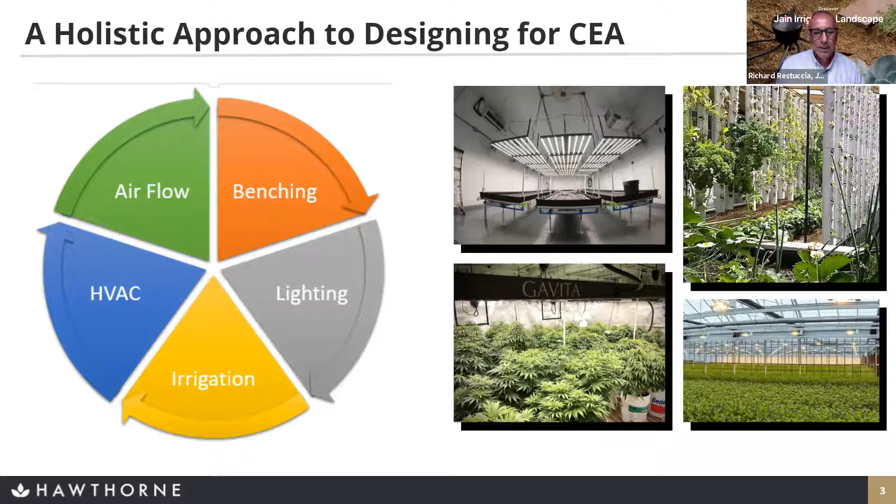And so in terms of design, that was a really great segue, because some of the design work, as you'll see on the left-hand side of the slide, is more about location, how things work geometrically inside the grow room. So we work with growers, depending on the types of crops and how people will flow and harvest throughout the room, on benching design, and we may help them with spacing and geometric needs. But we also do design work that has to do with irrigation, and in that case we have to do all of the specifications and sizing for pumps and all of the equipment that would be needed for an entire facility.

And by facility, I should mention that some of these commercial facilities are not just a few rooms or a few dozen rooms. They could be hundreds of rooms. So greenhouses are getting very, very large. And so this can be an extremely big operation to design the irrigation for these controlled environment agriculture cultivation systems. So on the right-hand side and in the top and the middle, I put in some images from our light design work.

Now, this doesn't just keep track of which products we're using, but it's using photometric software. So it's using mathematical software to actually assist in figuring out which light fixtures to use and where to place them. It also considers what the light levels are at different slices within the grow room environment. And so our design team uses this among other mathematical software to figure out how the design should be laid out, in order to provide the customers with a package for what they need to do to have the most optimal growth.

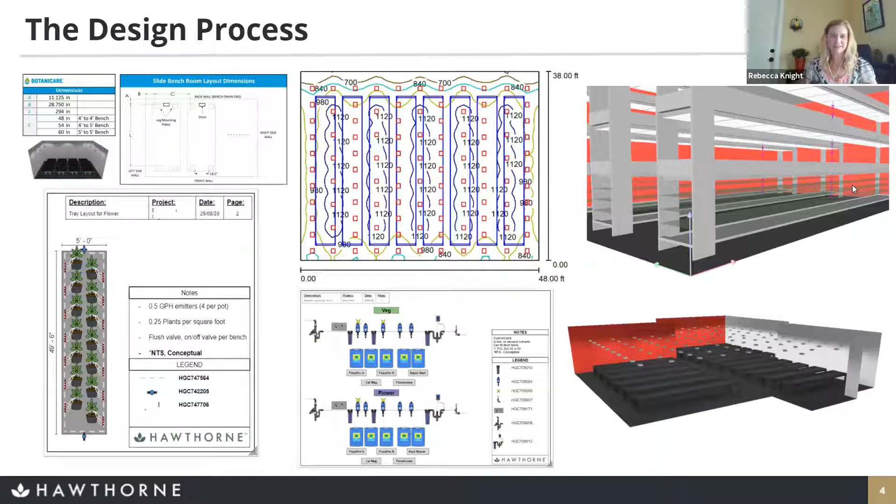So in the next slide, what I want to do now is shift into one of these areas. We're going to look at lighting. So we're going to talk about these interactions. The first one is going to be lighting and irrigation. So lighting is really, really important, as you can imagine. They're all important, but lighting is maybe one of the most expensive components of the operation. It also requires energy and cost to maintain, so to keep those lights going. So lighting is really important, and it has a very big influence on the grow room environment. It interacts with the environment, so with the other parameters.

So first, just want to point out that outdoors, we have the full spectrum of the sun. Granted, on a cloudy day, there'll be less intensity, but you get the full spectrum. Well, one of the neat things about indoor farming is you can supply just what the plant needs. So you're not going to give it the full electromagnetic radiation spectrum. You're not going to give it everything from radio waves to UV rays. You're just going to focus in on the rays that are important to a plant.

So in this diagram, you can see I've indicated red photons and blue photons. And that chart at the bottom kind of gives you an idea of the range of different colors that a plant would use. This is just a very general kind of range. But in the next click, what you'll see is that indoor lighting can come in a variety of forms. So each of these forms will produce different spectrums, different wavelengths.

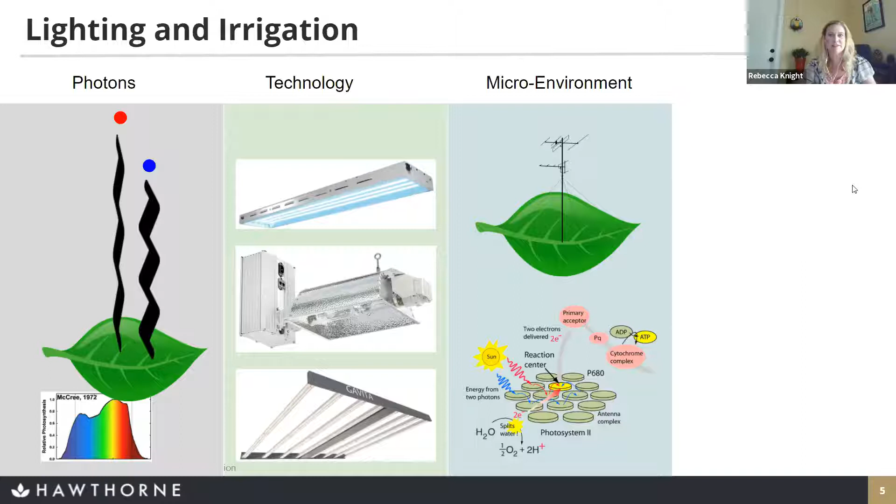All right, so one thing that I think about here is, we get about 12 hours of daylight right now, or sunlight, in Southern California. So in an indoor controlled environment, can I put the lights on for 24 hours and get 2 days of growth in one day? So that is a really great question for this last section of the slide. That's a perfect question, because it turns out that you cannot. And the reason is this. So I think if you click one more time, you'll see two terms that come up.

The first term is called the daily light integral. All plant species have what's known as a daily light integral. It's a value that indicates how much light it needs per day to thrive. Now, there are some plants and some microalgae that can develop their own circadian rhythm, but most plants need to have a dark cycle as part of their metabolic pathways and control. So plants have what's called a photoperiod. That's how long they're exposed to light. You can put a little bit of light on your plants and expose them longer with a longer photoperiod, or you can give them more light and a shorter photoperiod. Either way, you're giving them the same amount of light per day.

The caveat is, as I mentioned earlier, you can't give plants more light than they can handle. You'll have photodamage. That's too much energy. So there's always going to be constraints in terms of the maximum light levels you can give the plants. But the DLI is this indication that many things are interconnected. In this case, it's the particular crop and the developmental stage, the DLI, how much photoperiod you're giving it, and the intensity of light. So those are interchangeable.

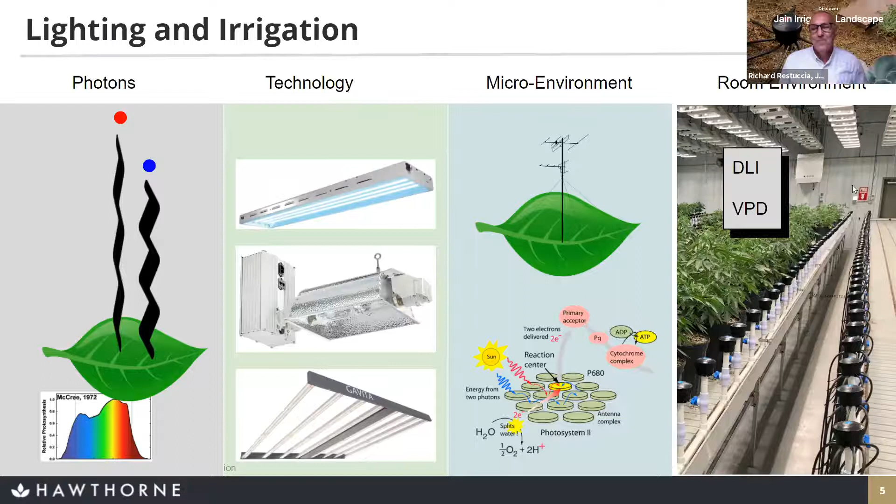Yeah, that's very helpful. And right, a lot of the answers that we have on here start with the words "it depends," and this is certainly one of those situations. So, okay, I think we're moving on to Shay now. Great. All right. Thanks, Rebecca.

So one of the main tying factors between lighting and irrigation is something a lot of irrigation folks out there are probably familiar with, and that's the evapotranspiration rate. So when you're dealing with something out in the field, you don't have the luxury of getting to choose your humidity and temperature range. And so you have to adjust things on the fly and figure out how to water based on a daily interval that might be changing and a whole bunch of different factors. Now, when you're indoors, obviously you have complete control over those things.

And this is something a lot of growers had to learn the hard way. When LED started becoming popular a few years ago, a lot of growers had a lot of set points like their humidity, their temperature, their irrigation frequency and duration. And they kept all those things the same and then dropped in some LED lights. And all of a sudden their crops were behaving really funny. They were transpiring less, so there was less water being taken up and therefore less nutrients being taken up. And on top of that, they were irrigating just the same. So then the plants were sitting in there with wet feet, so to speak, and just not able to grow as well.

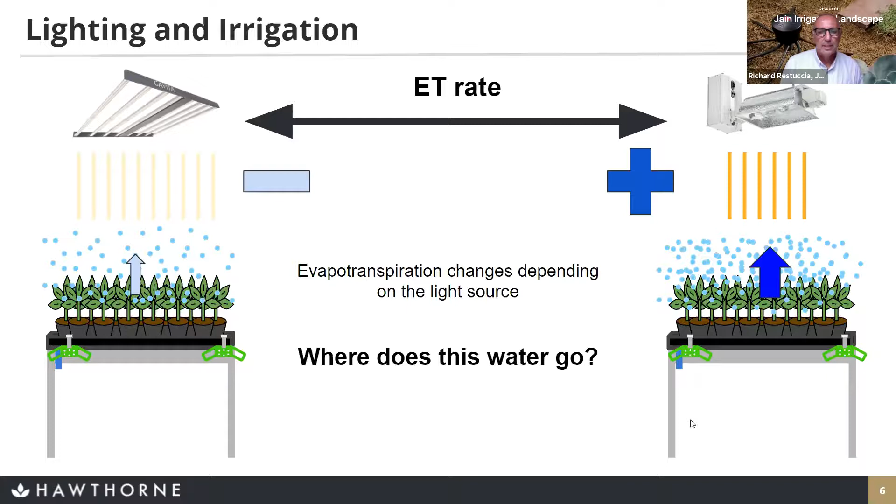So this next slide here is just showing that you need to balance the evapotranspiration coming off of the crop with what your HVAC is capable of. And you need to also not really oversize it. Patrick will get into this more, but plants don't like to have sudden spikes and changes in their humidity or temperature or really any sort of set points.

So if you have a really massive HVAC system, your humidity reaches, let's say 70%, and then all of a sudden it shoots down to 60%, and then it bounces back up, and it's doing that all day. Then you might have increased disease pressures, like powdery mildew, botrytis even, all these things that can sneak up on you if you're not keeping everything balanced.

And now, if there's no more questions on this specifically, I'm going to hand it off to Patrick, who is going to take more of a deep dive into HVAC systems and how we integrate all these things together.

Yeah, thanks, Shay. And I do have one more question before we go to Patrick. Do growers reuse the condensate from the HVAC at all? Yes, there are quite a few growers who do that. There are sometimes concerns that heavy metals can be accompanying that condensate water when you collect it. So there are systems available that filter that out. They're kind of similar to an RO system, reverse osmosis. But you can actually get very high efficiencies by capturing that condensate water and putting it back into your water tanks.

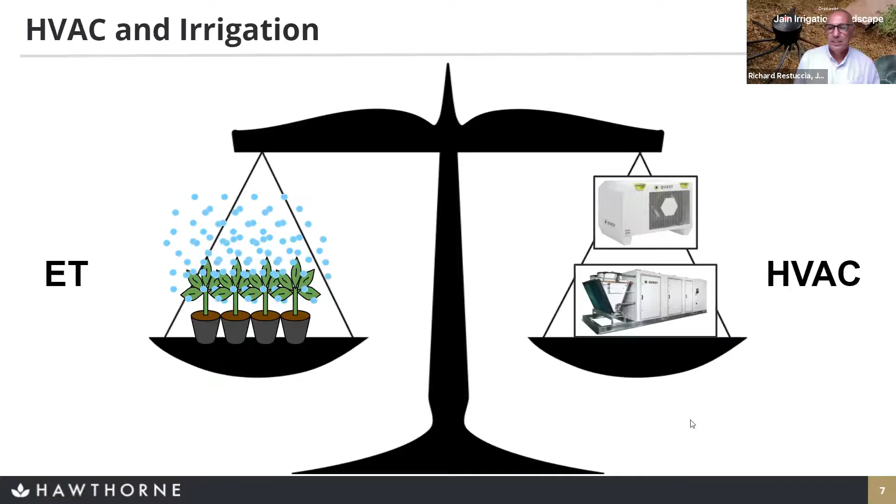Okay, great. Thank you, Shay. All right, Patrick, good afternoon. How are you? I'm doing well.

All right, so as Shay started to mention, HVAC is heating, ventilation, and air conditioning, and it's a very important component in controlled environment agriculture because all the water being introduced, we now have to mechanically remove it, or else it's still going to be in the space. So also answering that question earlier about counting ET rates, you have a little bit of a cheat there where you know how much is going in and how much is going out. So it can simplify the process for finding the ET rate.

But in the industry traditionally, growers would water by hand. We are starting to move away from that towards precision applications, and that makes it a lot easier on the mechanical side of things. If you have one very large watering event, all the mechanical equipment has to pull that moisture out in a very small period of time. You might remain above the threshold for disease pressure for longer, versus if you water frequently with less water each time, the mechanical system can quickly get your room under control, and it will minimize your disease pressures.

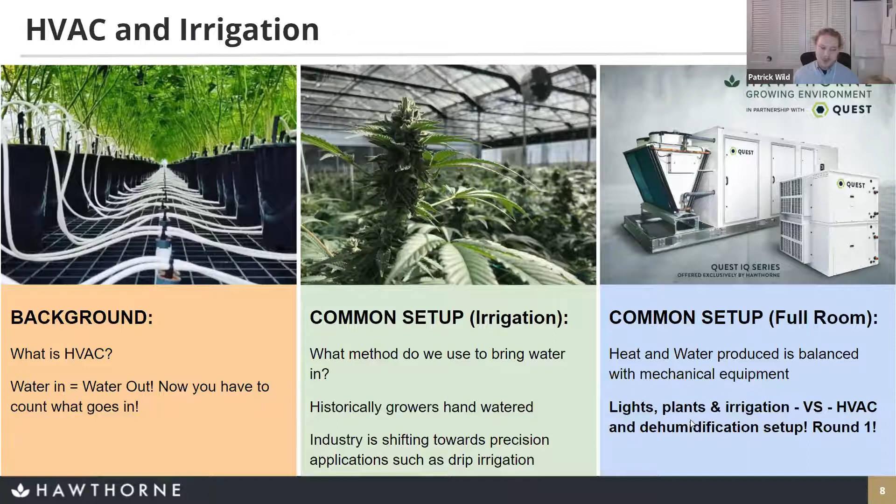So on the next slide, we have an example situation with some lights and some HVAC to see the balance. This example is during the day period. On the left, you can see that we've chosen a Gavita LED. The orange arrow pointing upwards is demonstrating that the Gavita light, when it's running, produces a lot of heat. So in this room, all the heat going up, we're driving that with the lights. Moisture with the plants, the irrigation, the plants will put off moisture. That'll increase the moisture in the space.

And then you can follow those arrows to the right side and see the mechanical equipment that is responsible for removing those conditions. So the dehumidifier, on the top, when it runs, will produce a little bit of heat into the space. It is an electrical system, but it will dramatically reduce the amount of moisture in the space. And then if you have an HVAC system as well, that is the only component that will provide the cooling.

So that's why the orange heat arrow is going downwards. And then you also get a little bit of free, I guess you could say, or accidental dehumidification as well. So we have that very small blue arrow pointing down there as well. And what's important to note here is that we do have this arrow between the dehumidifier and the HVAC system. The dehumidifiers traditionally are in the space. So when they run, the heat that they produce then has to be included in our calculation for removal.

So you can see that trying to create a balance where you have different mechanical objects pulling different directions, sometimes in opposite directions from each other, getting your balance right is very important, and getting it right at the beginning is very important.

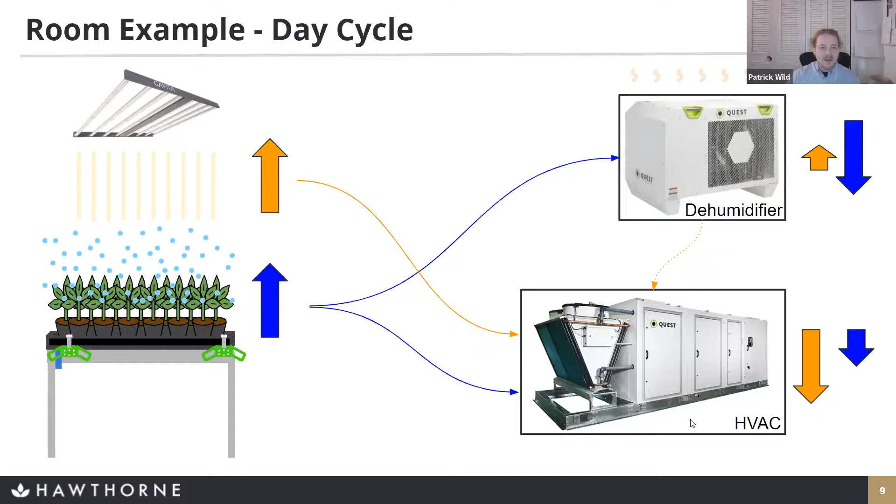So now if we go to the next slide, this is the night cycle. So the top left, the light is now off. We no longer have the orange arrow showing our heat is increasing. However, we do still have the arrow upwards for moisture. It's a little bit smaller than it was before, but it takes a while for the plant system to wind down. There will still be moisture put into the room. There will still be plants that will be producing moisture into the room.

So during the night cycle, the dehumidifiers will be the main mechanical system running. So as you can see, the HVAC arrows have become very small. We don't have all that light and all that heat being produced, so the cooling doesn't need to run as frequently, which means that we don't get as much moisture removed by the HVAC system, which means that the dehumidifiers then have to take over the majority of the work. So you can see that the blue arrow has increased in size and the orange arrow has increased in size. So during the night period, generally just the HVAC system will be running in order to pull out the heat that comes from the dehumidifier system.

Yeah, I think that's a good transition to the next slide if we don't have any questions. So it's interesting, right? Because on one hand, controlling your environment seems like it makes it easier, but there's a lot of variables now that you have to figure out that you don't have to if you're outside, right? Because you just have to take what you get there. Certainly. Do people adjust to this pretty easily? Is there software that helps them figure this out? What do they do about that?

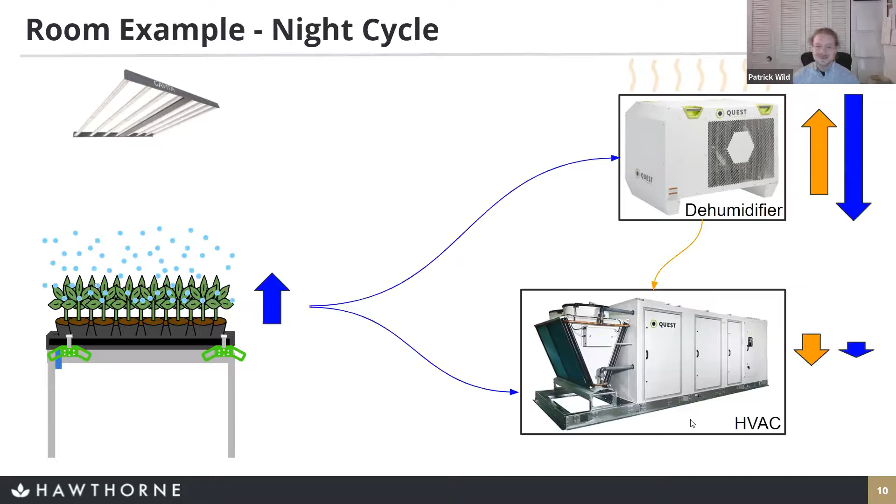Of course. Yeah, so with this right here also, I was misleading everyone a little bit with my label of HVAC. Technically, the Quest unit that you can see on the right of the screen is actually a very, very large dehumidifier that is designed for these loads. A traditional human HVAC system is designed to cool and remove moisture that is produced by humans in the building. The plants produce a lot more moisture than humans do.

So having this very large system that can run during the day and during the night is critical because we need dehumidification during night and day. We don't always need the cooling. And so then there is also a mechanical component of this system that allows you to decide what you do with the heat. So if you want to reject all of your heat to the outdoors, you're not doing any heating. If you would like to reject some of your heat to the inside, you're doing some reheat.

You could put it all in if you need to increase the heat. So that flexibility, particularly with the plant environment and within one piece of mechanical equipment rather than a bunch in a space, is very valuable. But the key notes to take away from here is that watering does dramatically affect HVAC. As we talked about earlier, low and slow, spread out the watering load across the day. It makes life a lot easier on the mechanical equipment and lowers the potential for disease pressure in your space.

And then finally, also, as you can start to see, there's a lot of complexity. So both the dehumidifiers and HVAC remove the moisture. HVAC's the only thing that provides cooling. So you really want to have a balance in your space, and you want to make sure that it's dialed in well. And then finally, the last point, quality equipment is key. Inefficient systems, you're now paying to reject that heat. So if you have an inefficient compressor or an inefficient dehumidifier, your upfront cost might be dramatically reduced, but you're going to pay for it in the long run.

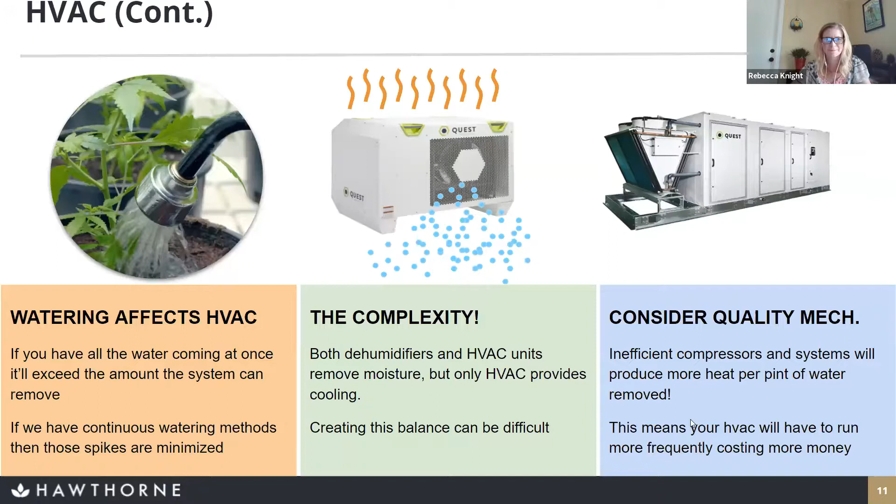Cool. Should we move to the next slide? I think it's a summary. So, just to summarize here, several systems interact very closely, and there are a lot that we didn't cover, like Rebecca mentioned. These things include nutrients, growing media, the environment, lighting, and everything like that. And we do have a team of people in the technical services department that are often specialized into their own kind of segment, but then we try and be generalists as well.

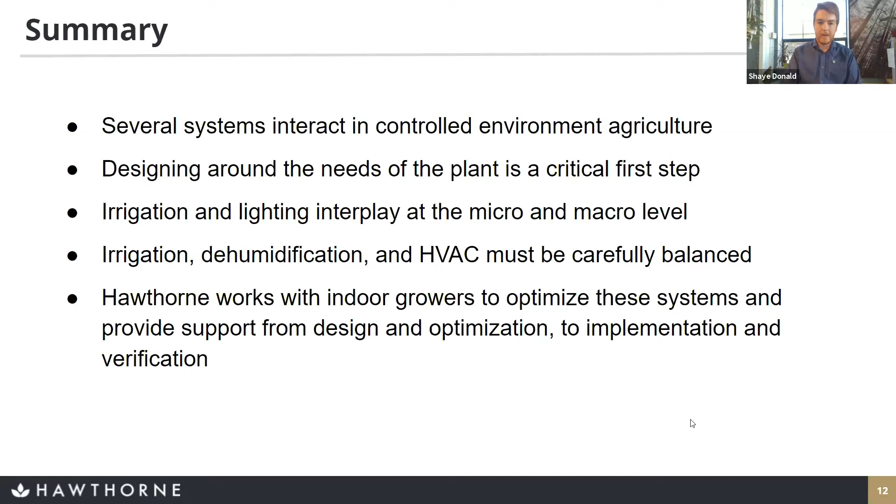So all those things are taken into account during the design phase, but then also, as we'll speak about next week, on the actual management and use of these systems. So to reiterate, the irrigation and lighting, interplaying at both the micro and macro level, as well as irrigation, dehum, and HVAC. All those things need to be carefully balanced in order to have an efficient and high yielding facility. So I think that about wraps it up there. And now I guess we'll open it up to questions.